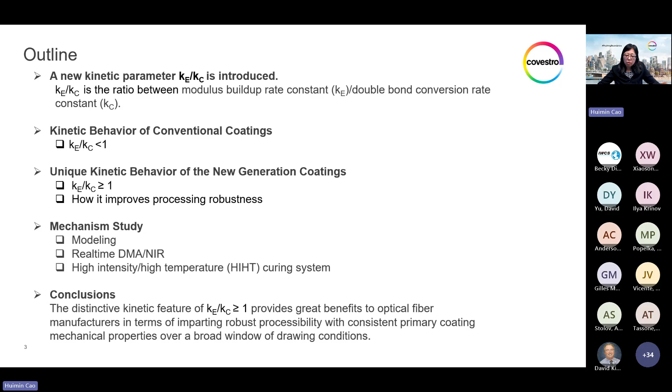And we did some mechanism study and proposed possible attributes why this unconventional kinetic behavior became possible with our new generation coating. And at the end of the day, what makes this feature interesting in a technical sense is its value in making the fiber drawing process more robust, which you will see at the end of the talk, the proof of actual glass fiber drawing results comparing both conventional and new generation coatings.

And here's a quick overview of acrylate coating free radical photopolymerization reactions through initiation and propagation. And this is the main process where the chain grows and the cross-linking network forms. And in the end, termination of radicals.

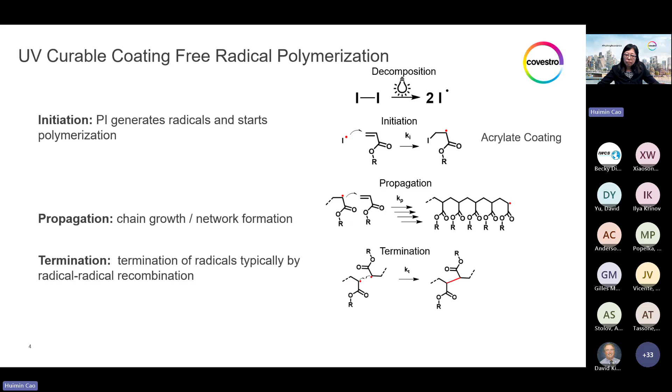The monitoring of double bond conversion through real-time FTIR or near IR gives this type of kinetic curve. And this curve fits very well into a pseudo first-order kinetic curve. And here's the first-order reaction equation used to fit this curve. You can see this is a perfect fit. The pseudo first-order model is not just empirical. It is actually well-founded by theoretical kinetic models, such as this most commonly used reaction diffusion model.

And this model assumes a steady-state propagation process where all these parameters are constants, which are combined into one overall rate constant K. And for double bond conversion, this would be Kc. And modulus buildup also follows the first-order kinetic curve, which you can see here is the real-time DMA. The experimental and the fitted curve fit perfectly well, and Ke is the reaction rate constant.

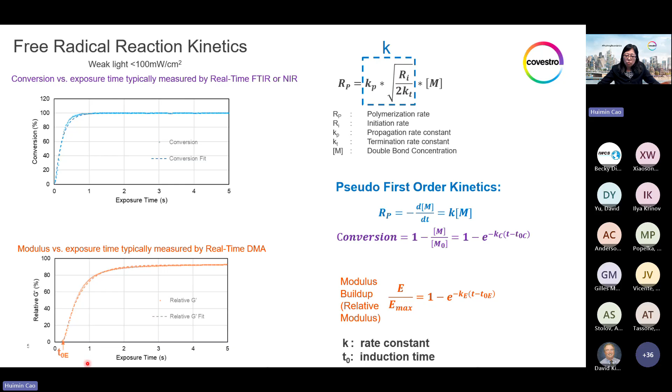And it should be noted that Ke and Kc are typically not equal to each other. T0 is the induction time where this curve started to rise. And T0E is always longer than T0C because it takes time for the reaction passing the gel time, turning from liquid to solid when elastic modulus starts to be measurable.

Here is to describe again our methodology introduced in our 2020 paper using the draw tower simulator, drawing a stainless steel wire fiber with the same coating process as the actual fiber drawing, wet on wet or wet on dry, microwave or LED lamp, and with the draw speed set up to 3,500 meters per minute. Very impressive. And for kinetic study, we would set the draw speed and lamp numbers to a series of low to high exposure times in order to capture a complete reaction process.

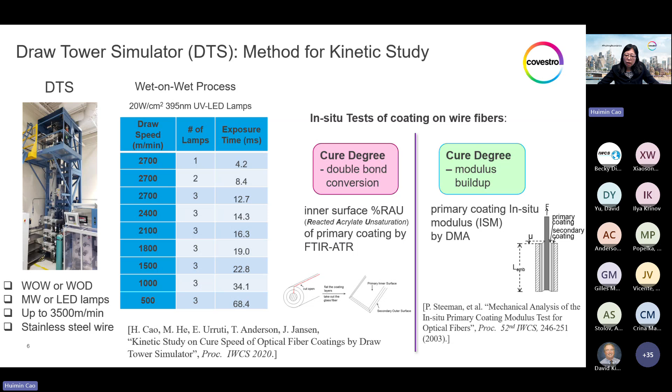And we measure the cure degree from the double bond conversion at the inner surface of the primary coating, represented by percent RAU, which means reacted acrylate unsaturation, as well as primary in situ modulus, we call it primary ISM, and it's described in more detail in our 2003 paper, which you can take reference to.

In our 2020 paper, we were showing 3 coatings, A, B, and C, in cure speed from slow to fast, not only in conversion from slow to fast, but especially in modulus buildup. This is A, B, C from slow to fast. And when plotting these into an ISM versus RAU curve, it shows A having the sharpest rise of modulus at the last stage of conversion, and C is much more flat.

But in terms of the shape of the curve, they all share the same feature, which is categorized as the accelerated increasing shape. That means the rise of modulus gets sharper and sharper at the last stage of the conversion. And this is the feature making the coating property very sensitive to the processing condition, even when you thought it cured very well, reaching 90% of the cure degree. The sensitivity of modulus rising is actually the highest in the last 10% of the cure.

For example, coating A at 80% of the conversion is only reaching 25% of the modulus, and at 90% of the conversion still only about 50% of the modulus buildup. And this may lead to a wide scattering of your coated fiber primary coating modulus, even with minor cure degree variations. And this shape of the ISM versus RAU curve is solely determined by this Ke over Kc ratio.

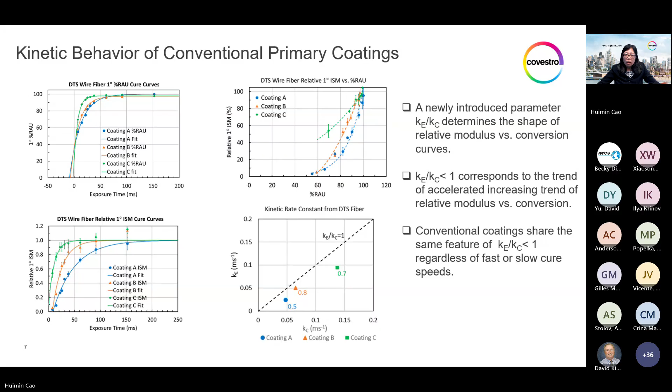One direct consequence of this sharp increase of modulus versus conversion at the last stage of cure is the fiber microbending performance, which is critical for overall fiber optical performance. And this will get worse from a rising primary modulus on fiber. From the classic model on dual layer coating mechanical microbending sensitivity, expressing the primary coating's buffering effect and the secondary coating's shielding effect, this factor Cmech, meaning the coating mechanical property factor, is roughly proportional to the square of the primary coating modulus on fiber.

When you correlate a coating property to fiber, you should use the property on fiber instead of on film, which could be very different. So even a very small increase of the primary in situ modulus could amplify fast into a higher microbending sensitivity of the coated fiber.

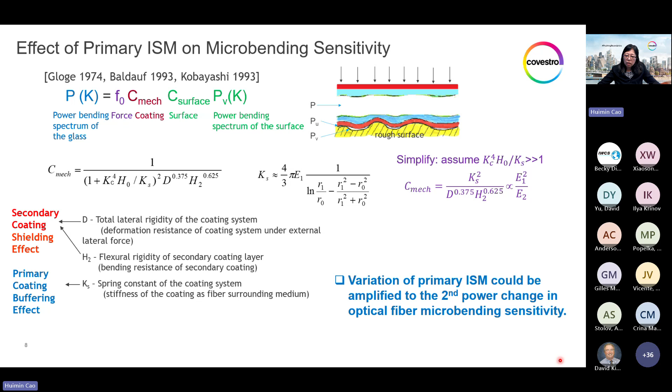And before we start to show our actual new coating kinetic behavior, first, it is interesting to see theoretically how it looks when this ratio equals 1 or is higher than 1. When it equals 1, the modulus linearly increases with conversion. And when it is higher than 1, it starts to show a decelerated increase in shape, which means the rise of modulus versus conversion will slow down at the last stage of the cure.

And if coupled with a reduction of induction time, this green curve shows, even with the same ratio, now the induction time is reduced, and this curve is further smoothed out into a near flat plateau at the last 20% of conversion, which is typically where commercial coating cure degrees are.

It should be noted that this conventional curve in red, which means sharply rising in situ modulus versus RAU, does not really mean the modulus is sharply rising at the last stage of the reaction time. From the left chart, plotting modulus and conversion versus the exposure time, you can see both are slowing down following first order kinetics. It's just that the conversion reached a plateau first, while the modulus is still rising. And this is the reason for the sharp rising trend when plotting modulus versus conversion.

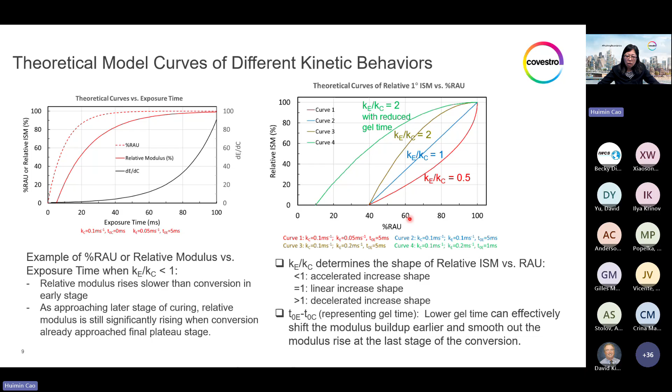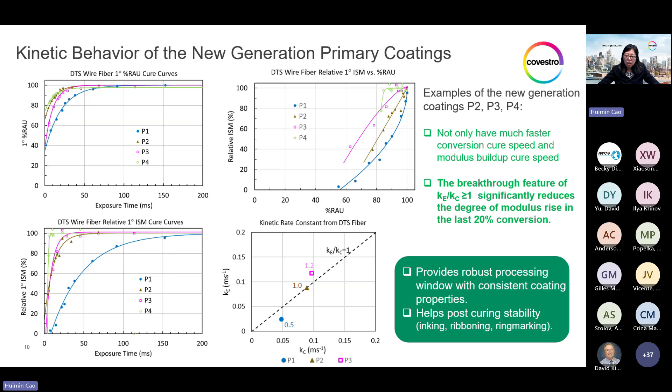And the new generation coating system has been proven significantly reducing this modulus jump after the post-curing, and this is a great benefit to the final cable performance. And with classic kinetic network model prediction based on the statistics of how each type of free radical reacts, the monofunctional monomers building the backbone and only difunctional oligomers building the crosslinks. And only when both sides of the oligomer reacted, one complete crosslink is being built, leading to a small rise of the crosslink density and therefore a small modulus increase, right?

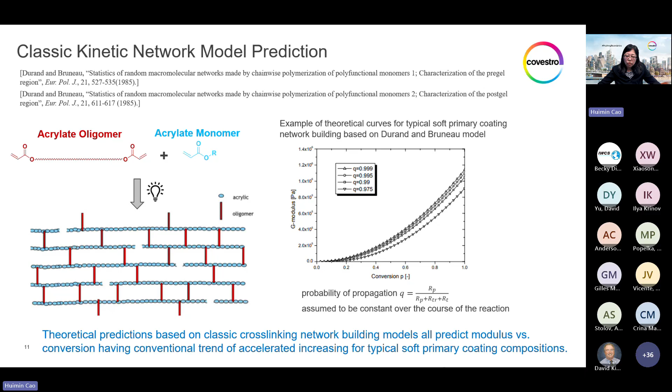And the prediction based on this probability statistics model naturally shows this conventional shape of accelerated increase of modulus versus conversion. And this statistic model did not even use the pseudo kinetic first order assumption, but it still reached the same conclusion, describing this accelerated increasing shape of modulus versus conversion. So then the question becomes, what makes our new generation coating no longer bound by this classic behavior of UV curable coating for optical fiber?

We think this has a lot to do with the uniqueness of the optical fiber drawing process, with the processing window much faster than any other coating application. Fiber draw towers are equipped with well-designed reflectors with the UV light highly focused on the tiny spot of fiber, which means much higher irradiance than any other coating applications. And the higher intensity light results in a very fast reaction, and the fast reaction creates extensive heat as exotherm. And plus, when the fiber drawing speed goes very, very high, the glass fiber becomes very, very hot. The fiber temperature can easily go even above 100 degrees C. And that also contributes to the fiber temperature during curing.

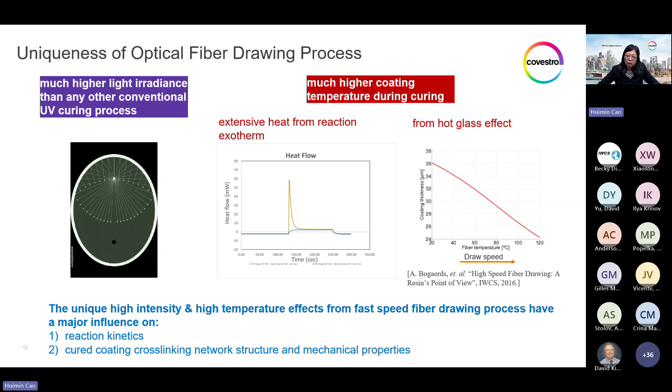And so from a photopolymerization process point of view, both intensity and temperature will have major influence, first on the reaction kinetics, second also on the cross-linking network structure, and subsequently coating mechanical properties. For the effect on kinetics, we used a custom-made instrument coupling together a real-time NIR with a real-time DMA, so that we can monitor simultaneously conversion and modulus in real time at the set temperature.

It is not a surprise that at high temperature, both the conversion and the modulus buildup rate will decrease. You can see the arrow pointing down from 50 to 100 degrees C, because the side reactions are occurring more at high temperature. What's special is the new generation coating P4, this green arrow, decreases much less than the conventional coating P1, the blue arrow. This means the new generation coating is less sensitive to temperature. However, when plotting the modulus versus conversion, the P4 is in exactly the same shape as the P1, still showing the classic shape of accelerated increase.

Very different from what we are showing from the draw tower simulator. We actually also anticipated this because these real-time methods are at extremely low intensity. They are at milliwatts level, so nowhere comparable to the actual fiber drawing conditions. Nevertheless, this experiment does show the temperature effect from 50 to 100 degrees C, where, in the direction these arrows are pointing, the ratios of Ke over Kc, which are labeled here, are all going slightly higher. And this means less drop of Ke than Kc at higher temperature.

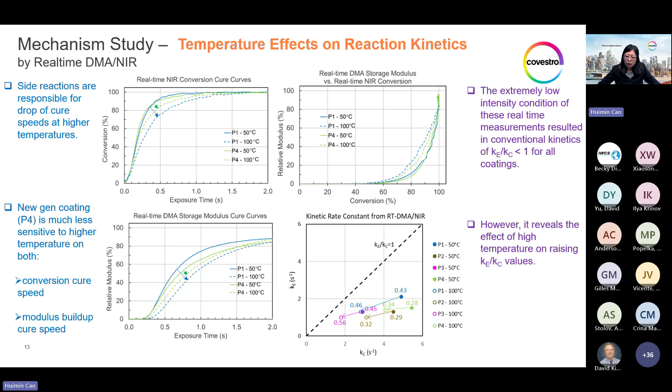And this is an indication that the fiber drawing process, where the fiber temperature during curing can be as high as 100 degrees C or even more, is likely to have a higher Ke over Kc ratio, and that maybe makes it possible to reach or exceed 1.

And the high temperature and high intensity also have a significant effect on the network structure. Under normal conditions of moderate intensity and temperature, the network is supposed to be rather complete, and some of the chain ends showing here are normal because all chains have intrinsic chain lengths, not infinite.

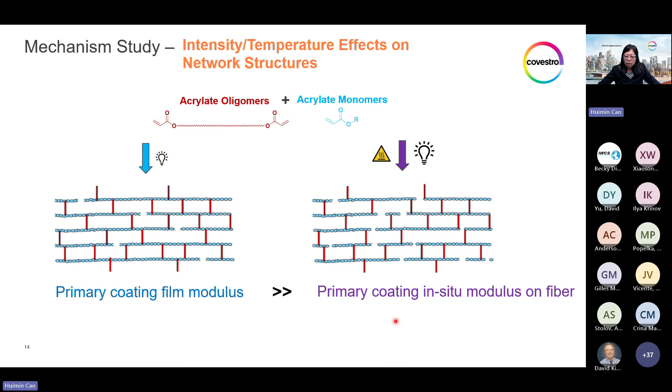But under a high intensity condition, the free radical concentration increases, causing the termination rate to increase. And in the meantime, under high temperature, side reactions take place more. Both the high intensity and high temperature cause some chains to end earlier. So it will end up having many more network defects, chain ends, dangling chains, and the consequence of these network defects is the coating modulus on fiber is always lower than film modulus. And this is a very well-known fact in the industry.

But to prove this in the lab, we custom-made this curing system having an LED lamp with a mirror design achieving very high intensity at 20 watts per square centimeter, much higher than a typical conveyor system, and a hot stage that can control temperature all the way to 150 degrees C. And this chart with 5 example coatings all shows the same effect: the film modulus with this high intensity device set at 25 degrees C, the purple bars, is lower than the typical conveyor system modulus, the blue bars on the left.

And then when the temperature rises to 100 degrees C, it further drops to the red bars. And the modulus level in these red bars in all 5 examples now closely matches the modulus on fiber, which are the green bars. So we assume this suppression of the plateau modulus on fiber caused by the high intensity and high temperature could very well have contributed to the higher Ke, because Ke is the relative modulus buildup rate constant.

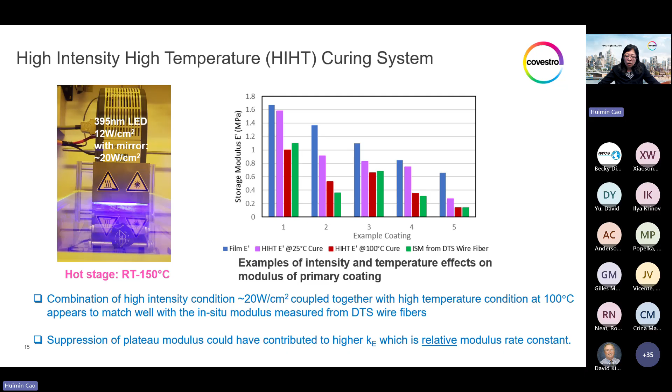With all these complex factors in play, much more complex than the simple conventional concept of fast cure, it definitely takes a much more advanced design of coatings to make the Ke over Kc ratio break the barrier of 1. Although our study used a draw tower simulator, it is intended only to be a simulation tool. In the end, the ultimate proof of processing robustness needs to come from the actual fiber drawing process.

And these slides compare 2 glass fiber drawing trials intentionally set with very wide processing windows. On the left, the conventional coating system; on the right, the new generation coating system. The conventional coating was set with 7 different conditions, all tuned to similar UV dose, with lamp number combined with intensity variations up to 3.4 times, and accordingly, a speed window of 3.4 times variation. And notice the resulting conversion ranges from 87 to 95, even at these similar dose levels.

Without more detailed discussion, here I listed some simple kinetic explanations why under the same dose, the change of intensity does cause cure degree differences. The new generation coating shows a similar range too, from 87 to 95% conversion. However, in this case, it was with a much bigger processing window of UV dose, not tuned to the same dose. It was intentionally set with 4.8 times variation, almost 5 times.

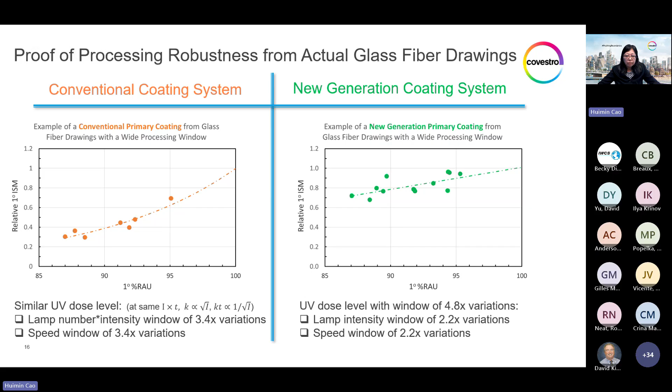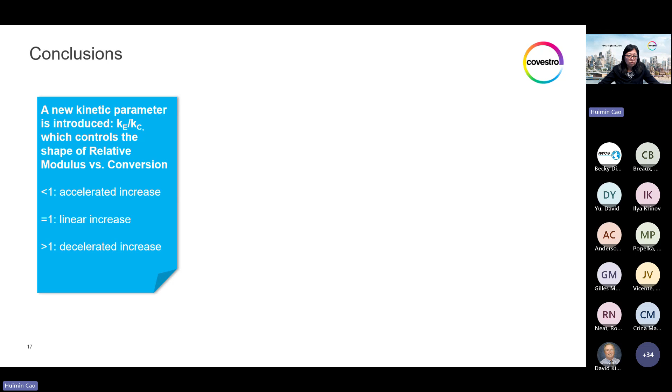So in conclusion, we introduced this new kinetic parameter Ke over Kc, which controls the shape of the relative modulus versus conversion. And we demonstrated our new generation primary coating exhibits the breakthrough feature of a Ke over Kc ratio equal to or higher than 1, which significantly reduces the degree of modulus rise in the last 20% of the conversion. And it provides very robust processing windows with consistent coating properties.

And we did some mechanism study. It demonstrated this is attributed to advanced coating design with faster modulus buildup speed and optimized sensitivity to the unique high intensity and high temperature conditions of the optical fiber drawing process.